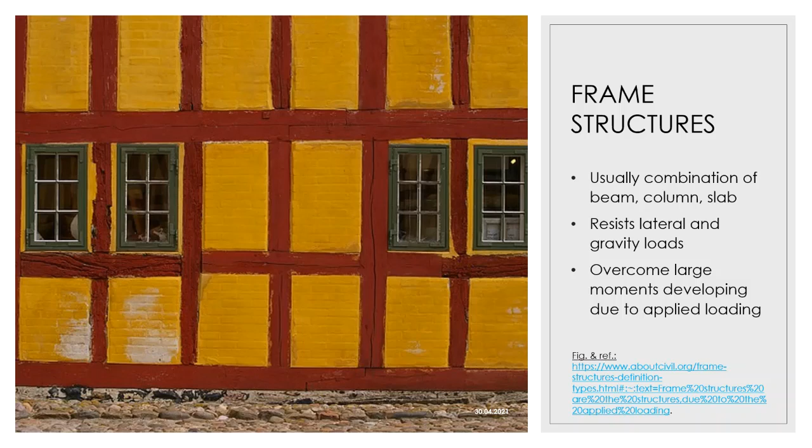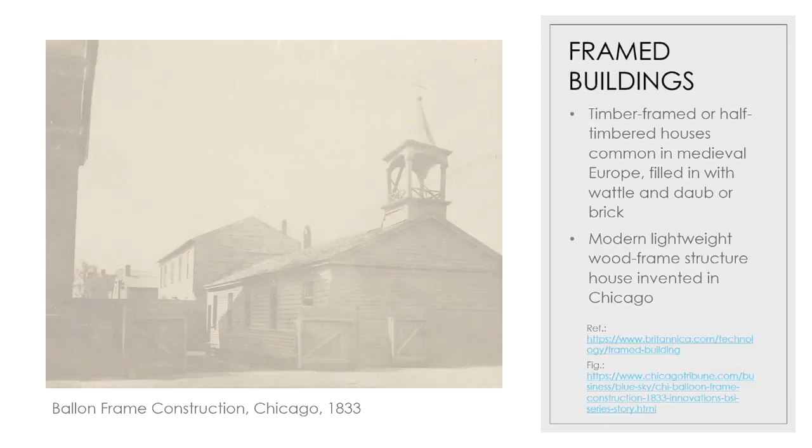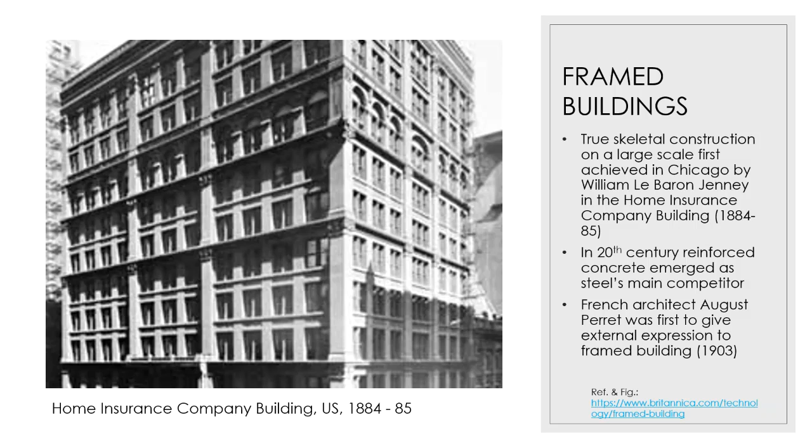The true skeletal construction on a large scale was first achieved in Chicago also, by William Le Baron Jenney in the Home Insurance Company building in the 1880s. In the 20th century, reinforced concrete emerged as steel's main competitor. The French architect Auguste Perret was first to give external expression to frame building, which was in 1903.

Frame structures are made by a skeleton that is able to stand by itself as a rigid structure without depending on floors or walls to resist deformation. The materials used are mostly strong in tension and compression, such as wood, steel, and reinforced concrete.

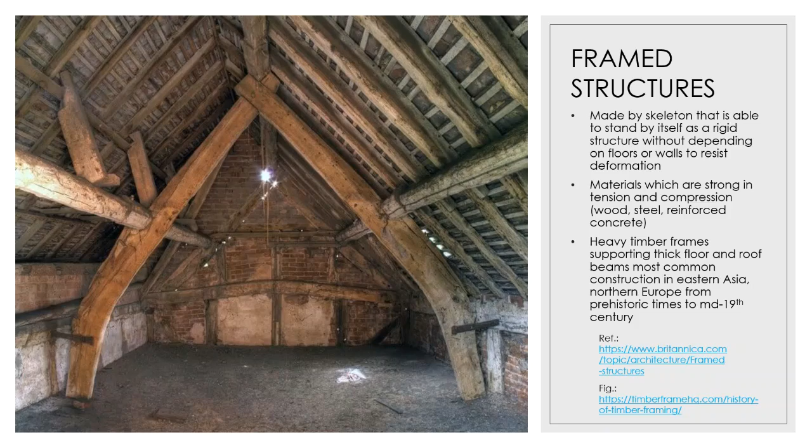They are composed of many small and closely spaced members. The post must rest on a level, waterproof foundation, usually made of masonry or concrete. The upper stories are laid on cross beams, which are supported on exterior walls by horizontal members, and the interior walls are also additionally supported by beams.

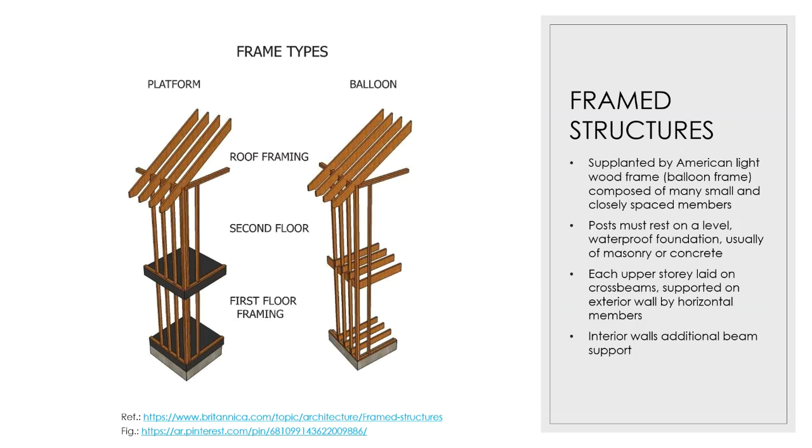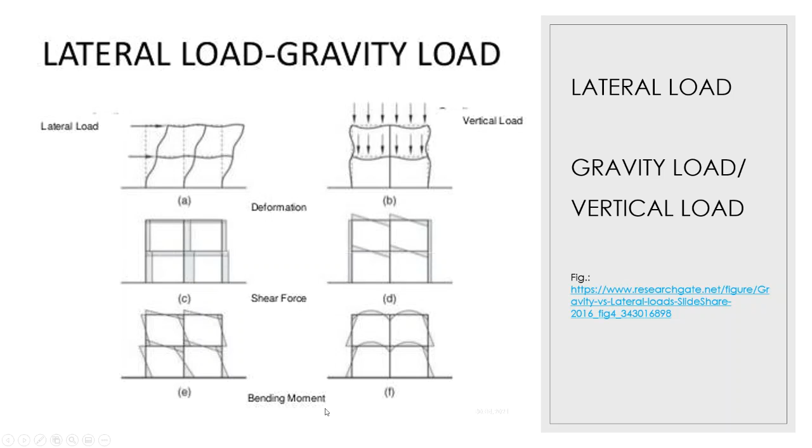Here we have a graph showing how the lateral and gravity loads affect the structure. In A and B we can see the deformation, in C and D the shear force, and in E and F the bending moment.

Here we have a figure about the load transfer mechanism. The slabs are supported horizontally by beams, columns, walls, or the ground, but the beams also withstand vertical loads, shear forces, and bending moments. The vertical support is by columns, which are supported by the foundation, and they transfer lateral loads, moment, and shear to the footing.

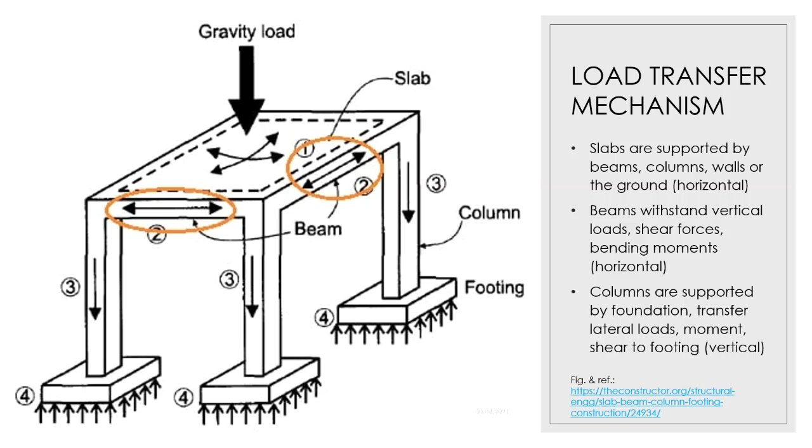Here we can see the component parts and their functions. Heavy timber systems mostly have beams strong enough to allow upper stories and roof projection beyond the plane of the ground floor posts, increasing space and weather protection.

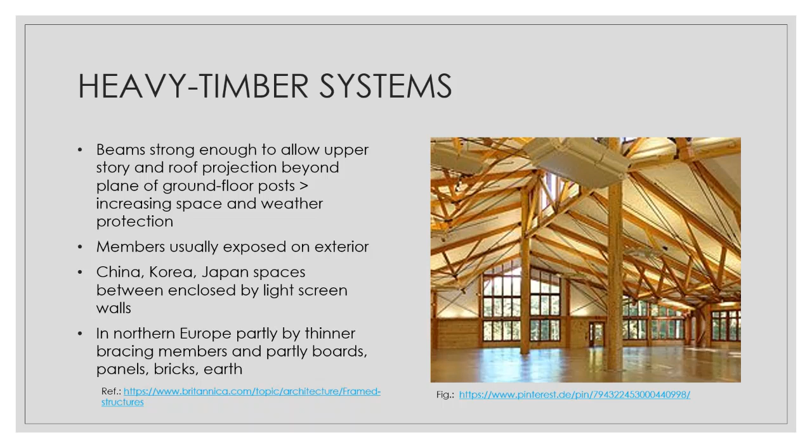The light frame is mostly sheathed with vertical or horizontal boarding or shingling, which is jointed or overlapping for weather protection, and the sheathing also helps to brace as well as protect the frame. It has not significantly improved because it lags behind other modern techniques.

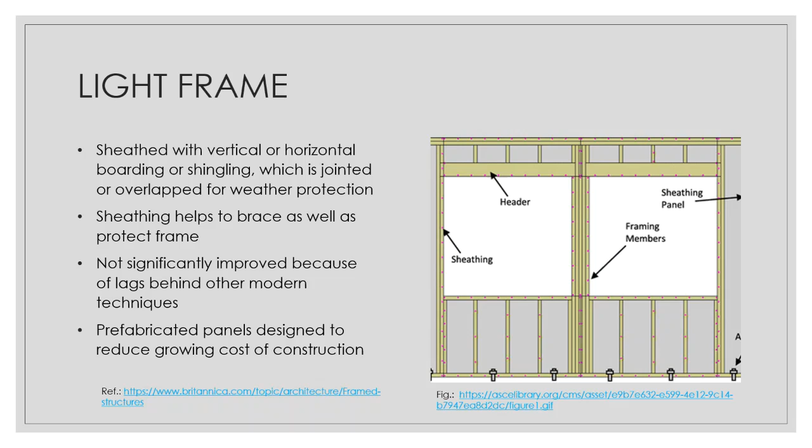Steel framing can mostly be used more simply than the other materials, especially wood, because of its much greater strength. It provides more rigidity with fewer members, and the load-bearing capacity is much higher than other materials. Of course, the steel must be protected from corrosion.

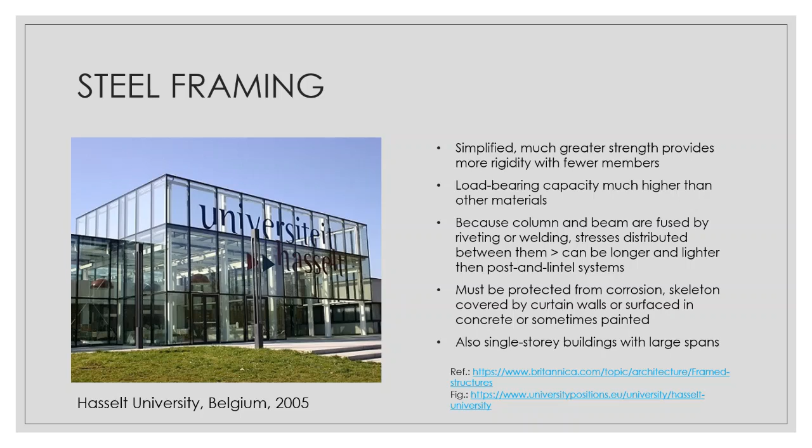So the skeleton is mostly covered by curtain walls, surfaced in concrete, or sometimes even painted. We have reinforced concrete framing, which has greater rigidity and continuity, giving more versatility. Steel is used in very tall structures and is also more economical.

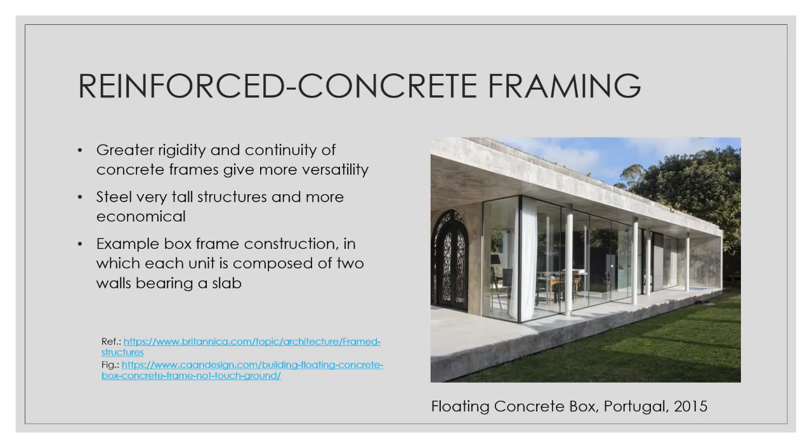An example of reinforced concrete framing is the box frame construction, in which each unit is composed of two walls bearing a slab.

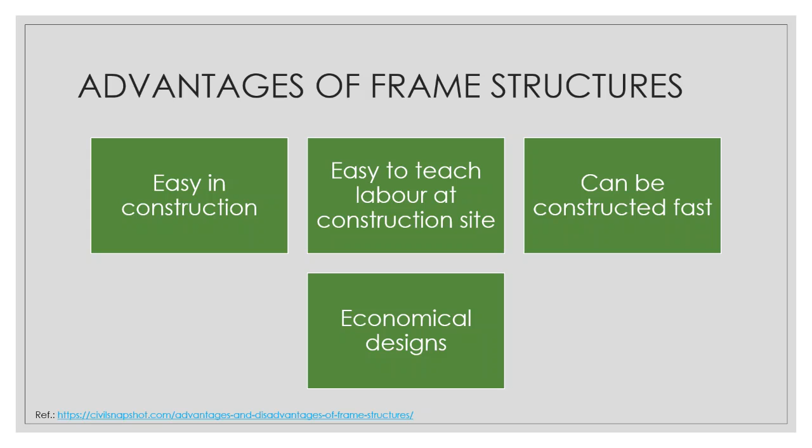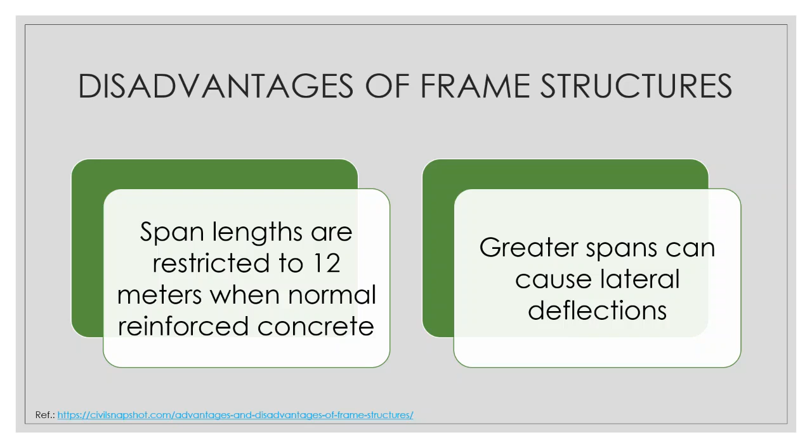The advantages of frame structures are that they're easy in construction, easy to teach to labor at the construction site, and they can be constructed fast, making the design economical. The disadvantages are that we don't have long spans, so when we have greater spans, it can cause lateral deflections.

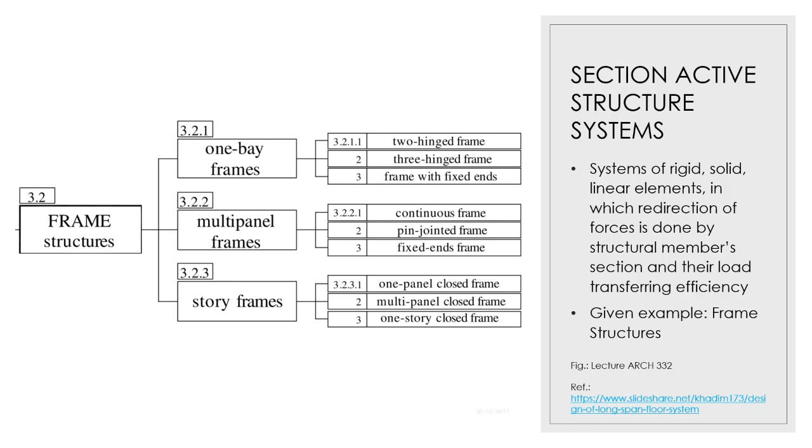Section active structure systems are systems of rigid, solid, linear elements in which redirection of forces is done by structural members, their section, and their load transferring efficiency. Under this category, we have the frame structures.

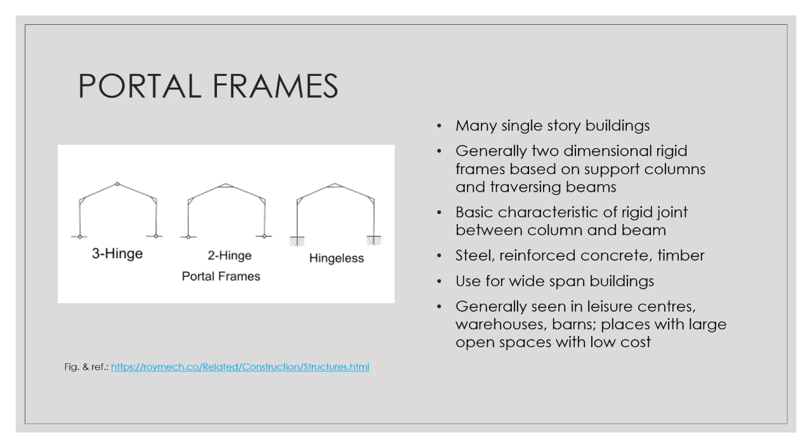For example, the portal frames. We have three types here: the 3-hinge, the 2-hinge, and the hingeless one. They are mostly used in single-story buildings and are generally two-dimensional rigid frames based on support columns and traversing beams. They are generally seen in buildings with wide spans, such as warehouses or barns.

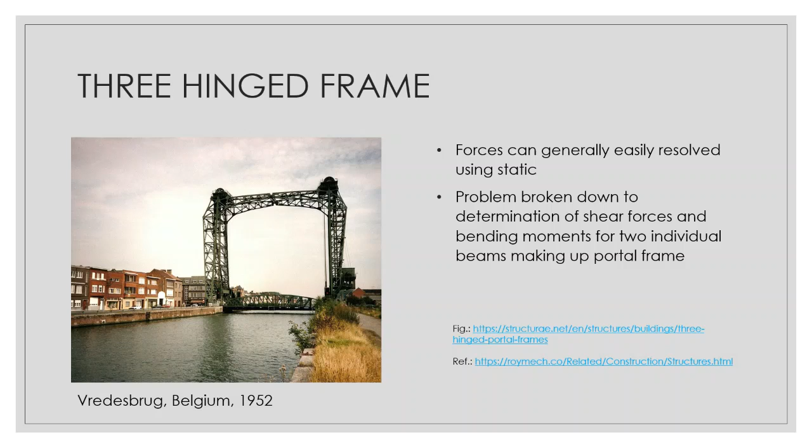In the 3-hinged frame, the forces can generally be easily resolved using statics. Then we have the hingeless or 2-hinged frame. The 2-hinged and hingeless, or fixed-end, frames are statically indeterminate structures, and static conditions have to be used to calculate the end reactions and moments.

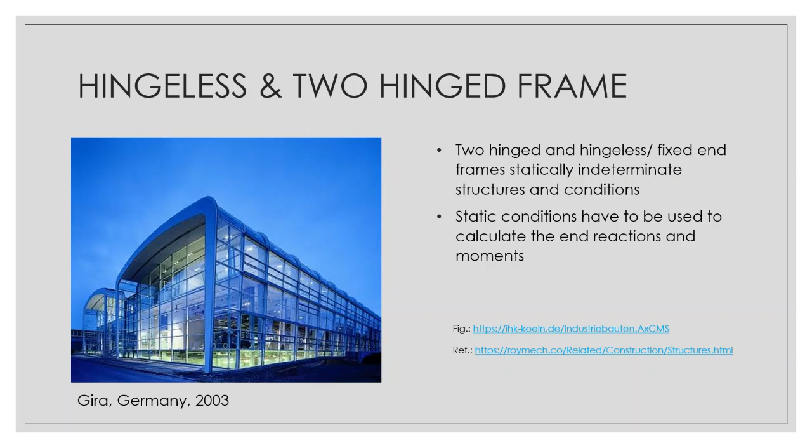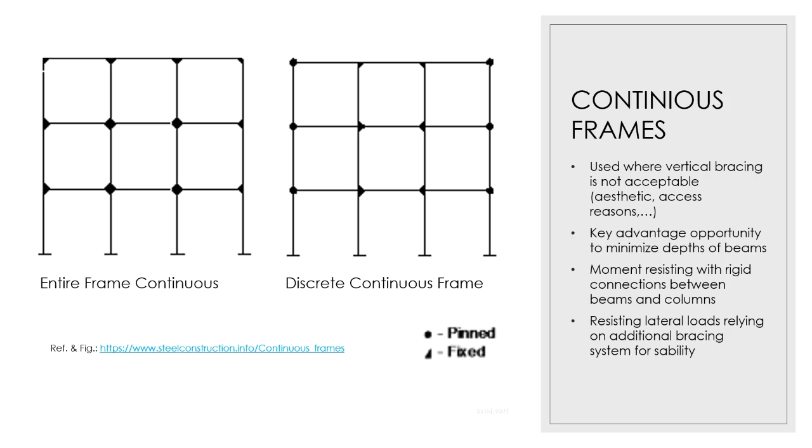Then we have the continuous frames, which are used where vertical bracing is not acceptable, for example for aesthetic or access reasons. The key advantage here is the opportunity to minimize the depth of beams. We can ensure stability, though this is less economical than bracing, because we have a combination of two systems that can provide a balanced solution.

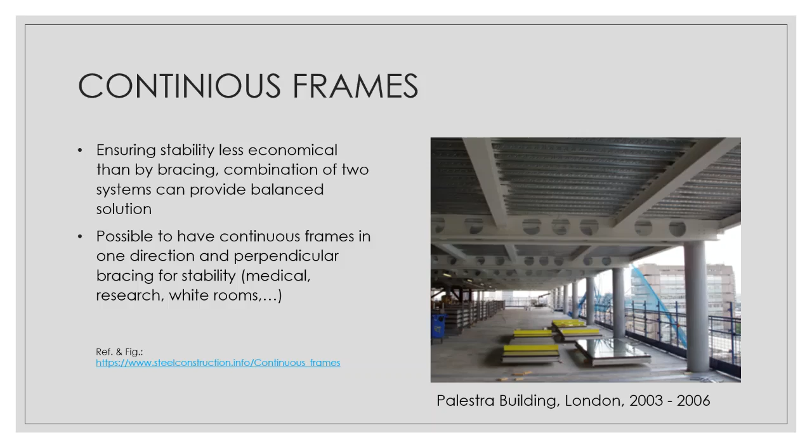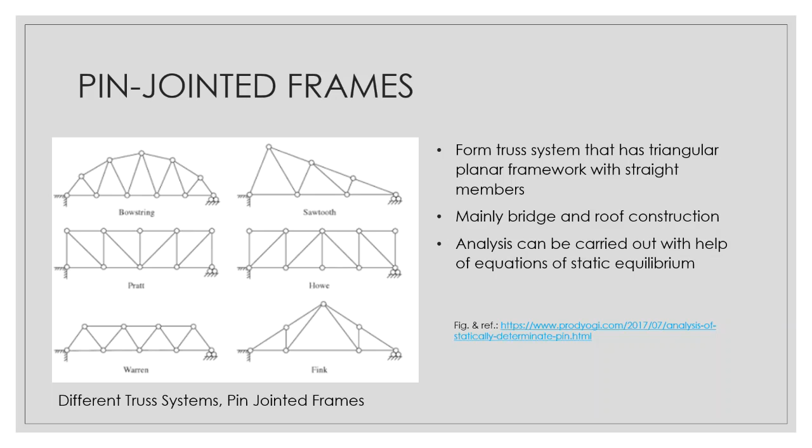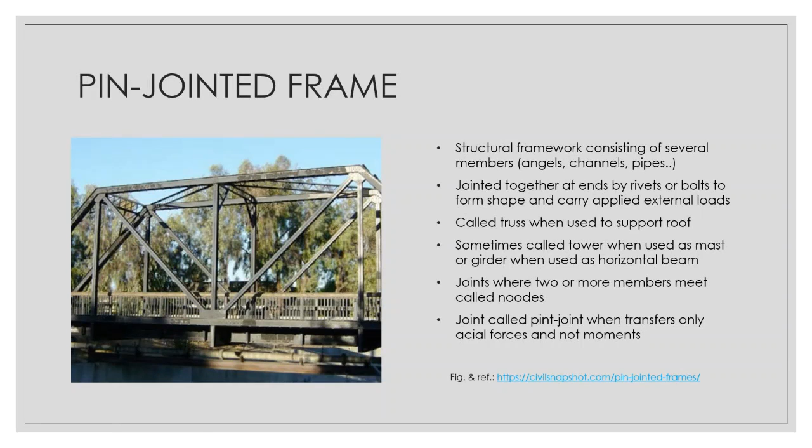The pin joint frames. Here we have some different truss systems with pin joint frames. They form truss systems that have triangular planar frameworks with straight members. They're mainly used in bridges and roof construction. The structural framework consists of several members, such as angles, channels, pipes, etc.

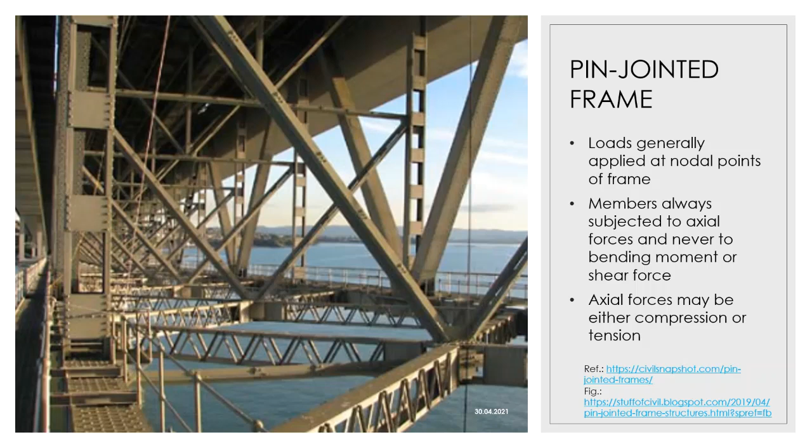The loads are generally applied at the nodal points of the frame. The members are always subjected to axial forces and never to bending moment or shear force. The axial forces may be either compression or tension.

Braced frame systems are composed of beams and columns that are pin connected with bracing for lateral loads, and their resistance to lateral forces is obtained through both horizontal and vertical bracing.

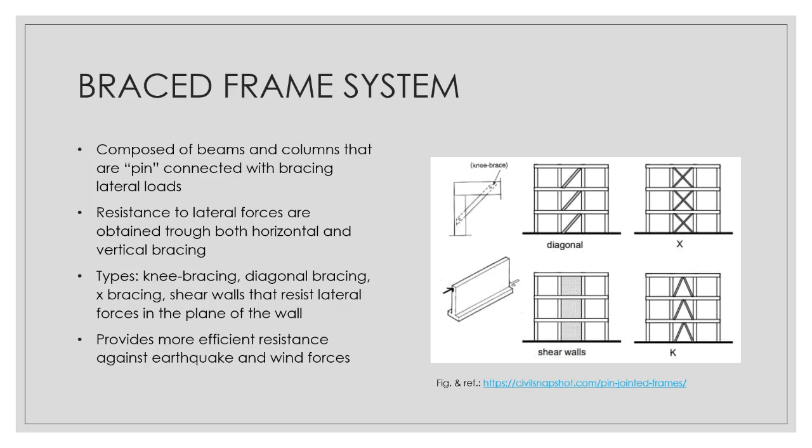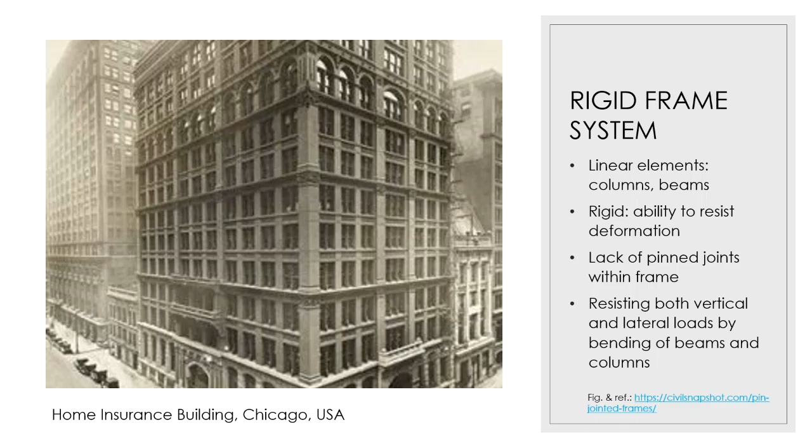The rigid frame system has linear elements such as columns and beams. It is rigid and resists both vertical and lateral loads by bending of the beams and columns.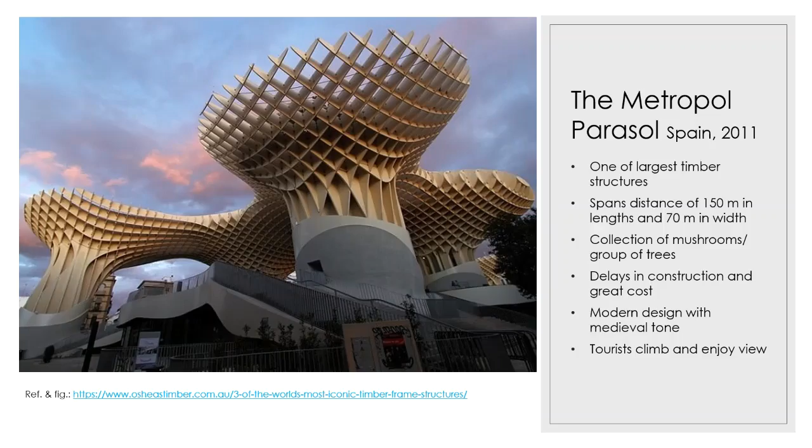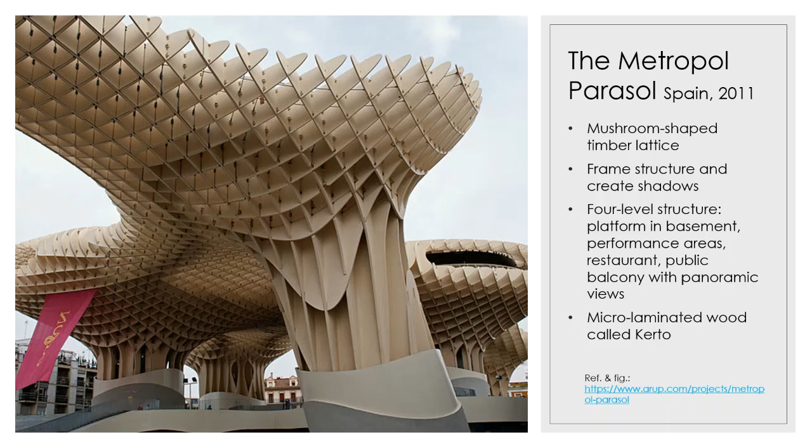Here we have an example of the Metropol Parasol in Spain, the largest timber structure in the world. It spans 150 meters in length and 70 meters in width, with mushroom-shaped timber lattices, and the frame structure creates shadows. It has a 4-level structure, including a platform in the basement, performance areas, restaurants, public spaces, and a public balcony with panoramic views. The material used is microlaminated wood called Kerto.

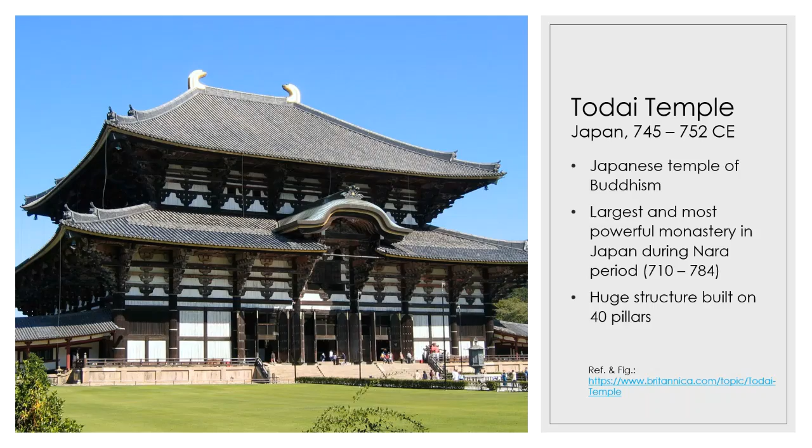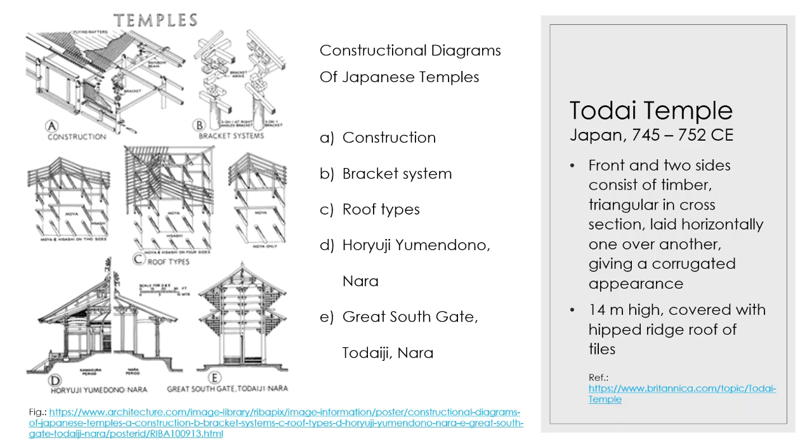Another example is the Todai Temple in Japan, built very early as a Japanese temple of Buddhism. It is a huge structure built on 40 pillars. The front and two sides consist of timber members triangular in cross-section, laid horizontally one over another, giving a corrugated appearance. It is 14 meters high, covered with a hip-ridge roof of tiles.

The next example is 88 Wood Street in London, a superstructure rising over 18 floors, with the main frame made of reinforced concrete and post-tension slabs. Six structures are located outside of the main body, forming a braced external structure with rigid connections between concrete beams and columns to ensure stability.